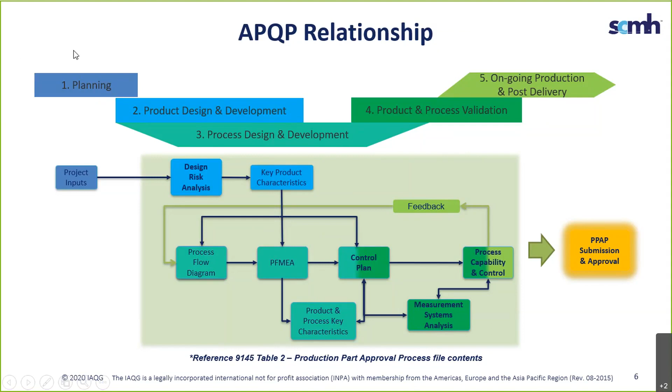Okay, so really, PPAP itself, production part approval process, is really to give confidence that the supplier has all the necessary information to produce the parts, that they've reviewed all the information and they know that they comply, that they prepare the start of production so that when we enter into production, we're providing good parts right away, and that they're capable of conforming all the key characteristics to a capability of 1.33 CPK.

And really what this means is as we move forward, the idea is that for the first parts that come into production, we reduce the number of QNs or the number of complaints that suppliers will receive from customers, and that it allows us to move forward with a minimal impact on the assembly of anything for final production.

Inside of aerospace, there are some differences. So we recognize that although APQP has been in other industries for many years, there's definitely some differences in aerospace and defense. One of those is low volumes compared to, for example, automotive, where we're talking millions of parts being produced. In aerospace and defense, it could be 1, 10, 100 parts that are being produced.

The life cycles are much longer. Again, an example of automotive, it's based on 10 years approximately for most vehicles, whereas for aerospace engines, we're talking 30 years. So there's a much, much longer one, as well as the level of regulation from all of the different government bodies. So there's a lot of different complexities for that mix of low volume and high mix. Okay.

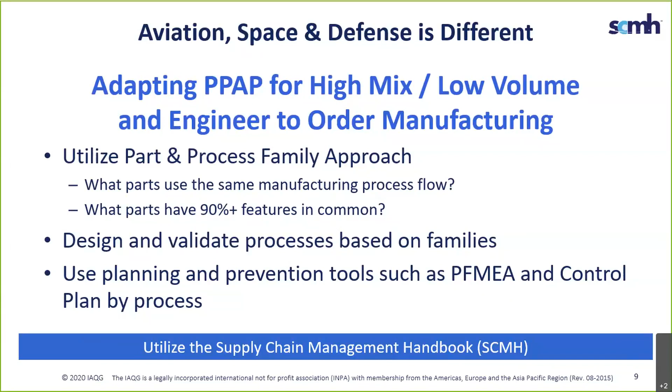But when we think about this slide and we think about PPAP, think about it in these terms. We want to deliver all the time, on quality, on time, on cost, every time, all the time. And the PPAP process allows us to do that because we've satisfied all of the requirements that are going to allow us to get to a customer demand rate.

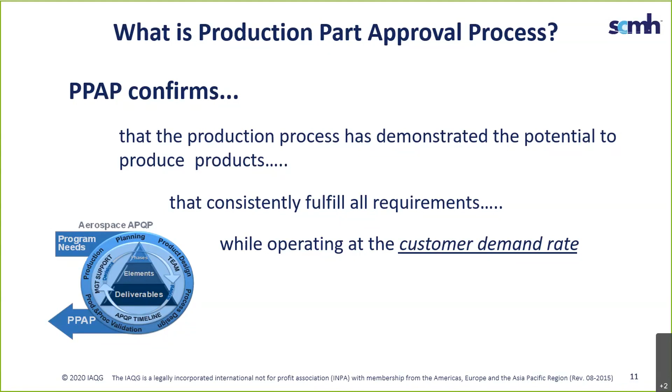But one thing we can certainly say that's always true, anytime we're trying to do an approval process, is the earlier we start, the better the results. Planning is always the key to success. And it's really no different when we're talking about PPAP than with any other type of initiative trying to satisfy customer expectations.

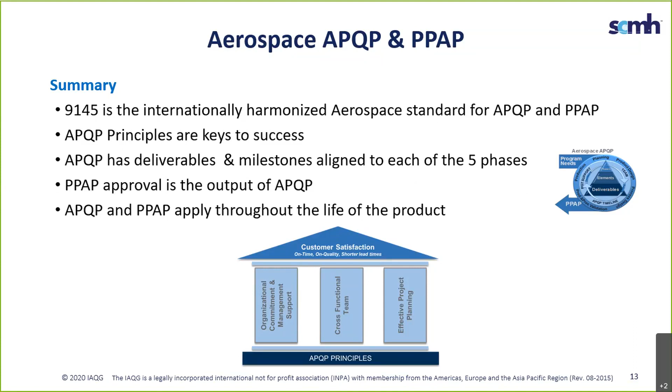So PPAP is not something that happens at the end when we ship products. It's not just paperwork at the end, but really it should just be a collection of that information that all comes together when the PPAP is due. It also defines all of those standard deliverables that are required. So the elements are very standardized. So what we expect for each part is very, very clear.

First article is included in that and is part of that production validation. So there is an element for FAI, and as we move forward, there are teams within the industry that are looking at pulling both the FAI and PPAP even closer together to make sure there's no duplication. And then all the elements should be updated whenever there are process or product changes. So there is a resubmission.

So if we look at PPAP, a lot of the documents within it are quite often referred to as living documents. Even after submission, these documents stay active so that if there's any changes within the process, they remain accurately describing what the current process is. Okay.

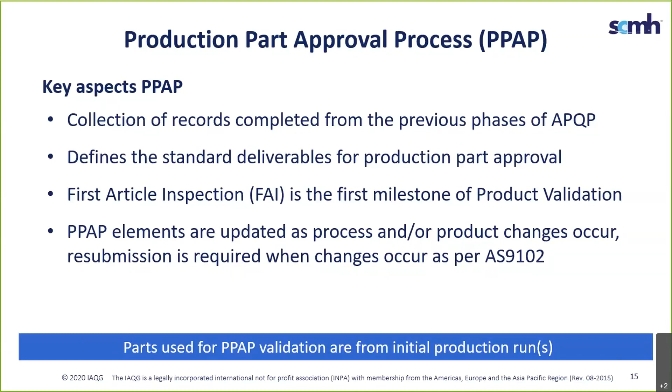And once we hit phase 4, if you want to consider it a gate, basically, before we go into production is when that information is submitted to the customer, and you need to receive a formal PPAP approval before you ship the product. So really the idea is that we know that the product has been verified and validated before the first parts are received by the customer.

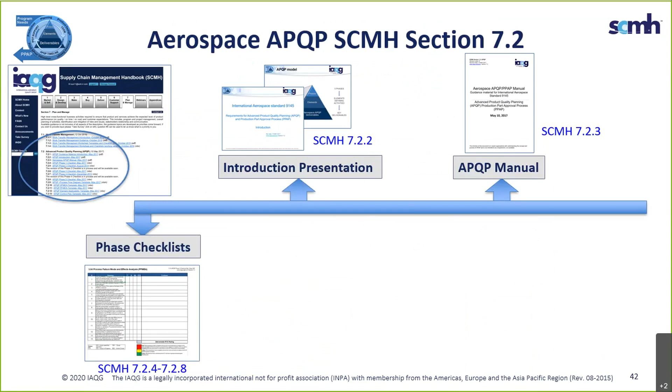We have phase checklists that we've referred to a few times throughout this presentation. We have tools and templates, and I would tell you that some of these have been posted just recently, some of them in December of 2019. So the industry's been working hard behind the scenes to commonize, if you will, all the templates, so that if you get a requirement for a PFMEA from customer A or customer B or C, you would expect to use the same template to satisfy each of those applications. Again, trying to drive out the customer uniqueness and make it more of a standard approach.

And then I want to highlight the maturity assessment. If you haven't seen this tool, it's an excellent tool to see where an organization stands in terms of satisfying and meeting APQP. It goes through 5 core sections, and it asks questions to see where you are on the continuum of 1 to 5. And if you can get to a 3, I think you'll be right where you need to be, regardless of who your customer base is.

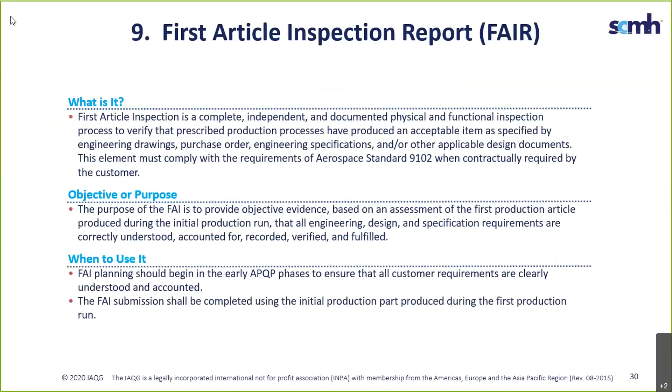This one might give clarification of slide 27. Why MSA is listed under phase 4 on the table while it's showing under phase 3 on the APQP PPAP graph, slide 20. Sorry, just 1 second. So on slide 27 and 20. Yeah. So can you repeat the question, please? So on slide 27, why MSA is listed under phase 4 on the table while it's showing under phase 3 on the APQP PPAP graph, slide 20.

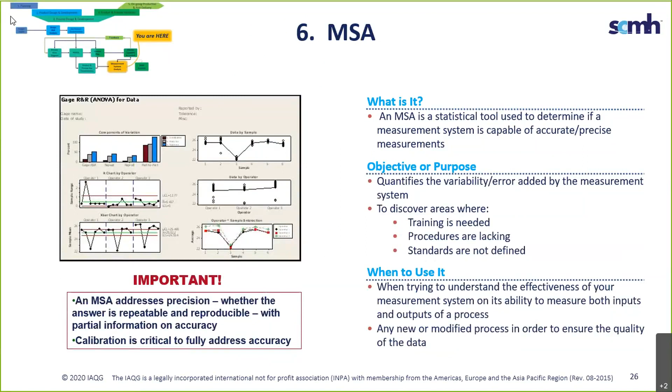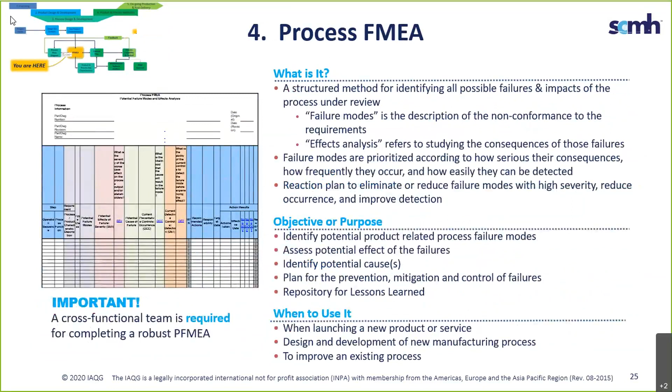1 second. We can look into that after if it's something that's just a clarification. I was going to say, I'm just looking at slide 20 as the design record. Yeah, I'm not saying on slide 20 as design records. I just had the wrong number. Yeah. Okay, let's just save that for after. I wasn't sure if it was something that was an intent thing or not.

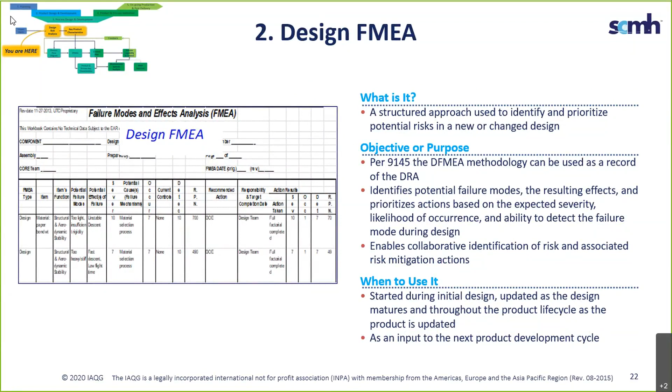Could you please elaborate how these steps translate into box build products, software performance, final system performance? And I'm thinking the steps they were talking about is around that same area. Okay, also, again, maybe it's not clarified enough. I was going to say, I don't necessarily understand the question there. Let's move on to another question. Sorry, if you can clarify that, we'll try again and just add it to the question box. As people have known by now, I'm reading from the question boxes, which is Q&A, and not the chats.

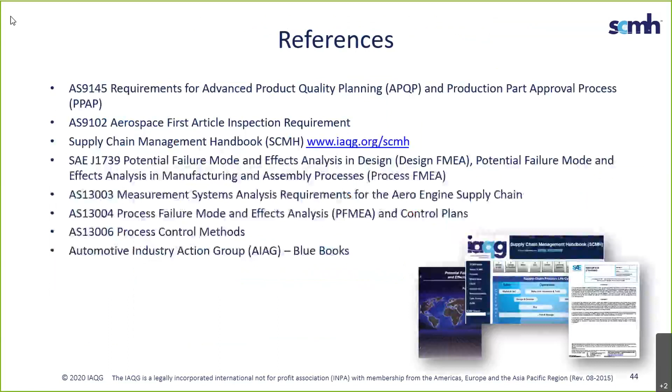In automotive, we submit capability on SC/CC features that have been identified in design. If there are no SC or CC features, what is the default? Again, in automotive, it was up to the supplier to pick a number of features to submit capability on. Same in aerospace, or could be a CSR. Lots of acronyms there. So I would say it's very similar, obviously, as it comes across to aerospace.

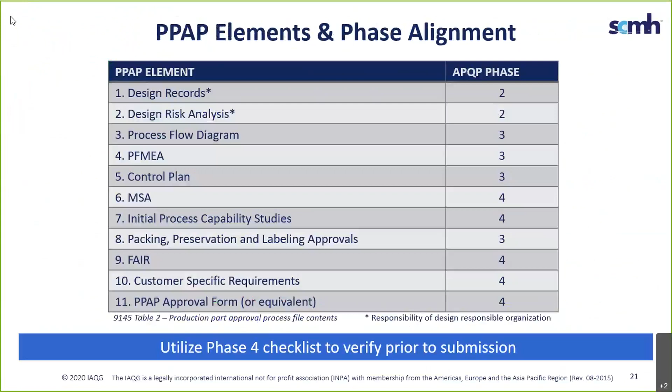Obviously, if there are KCs that are identified by the customer, those ones are going to be reported, as you alluded to. By the same token, if there are not, or if there are additionals, I would say the supplier should propose which ones they would use with the customer and just gain agreement.

Those can be done earlier, so not everything, and again, this is the difference between APQP and PPAP. Although you're putting a PPAP package together as we move into phase 4, any of these types of questions, or anything else where you identify stuff, can happen anytime through your process. So your best bet is always to gain customer agreement earlier on rather than waiting and just submitting it with a PPAP package.

I would try to gain those once you have your drawings updated and you've identified what you would like to control. I would just get the blessing of the customer, and then you've got the documented proof that you just put into your PPAP, and there'll be no questions. Rather than, in some cases, waiting until a PPAP is submitted and then finding that your customer disagrees with what you've picked; then there are delays, obviously, in approvals and everything else. So the philosophy of APQP, same as automotive, is to identify this stuff earlier in the process.

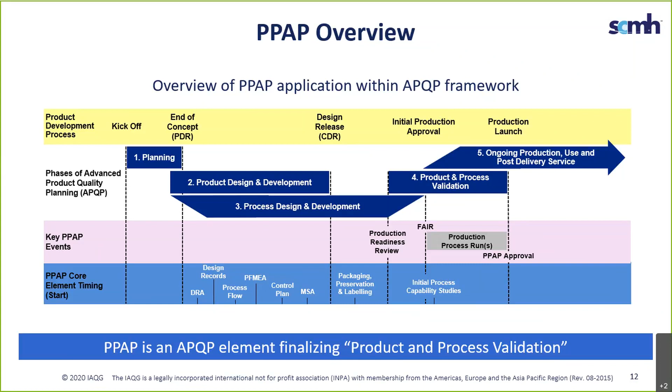When manufacturing can improve CPK as time and experience progress in manufacturing the parts, are small changes made based on learnings from DOEs that improve process control considered as potentially rendering a PPAP invalid and requiring reapproval? So, good question. I will answer this in a very cautious manner. Same as in automotive, the onus is always on the supplier to report changes in their process to the customer. Each customer usually will have some method of identifying how those changes are approved. Whether a PPAP is required or not is really a secondary question after the notification.

For example, if you approach your customer with a change, they may or may not say that a PPAP needs to be updated. They may say that you don't need to and that it's current. Or they may ask you to resubmit certain elements, i.e. the initial process capability or the FMEA or something like that. My history in automotive tells me that if a supplier told a customer about every single change that has a potential impact, the customer would say, "You'll shut me down."

But the same message is always there. The supplier should notify a customer of any changes, and then it can be decided between the responsible parties whether an update is required. There's not always a PPAP update required to be submitted, but the file would always be updated. So for changes, contact and follow your customer's policy, whatever it is.